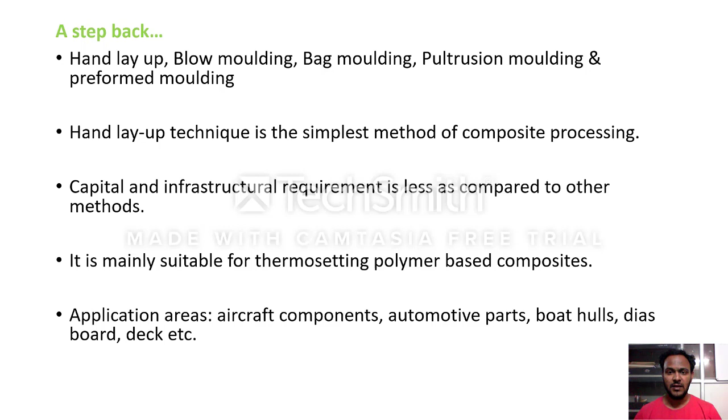So this is the brief introduction of the previous lecture. In the previous lecture I explained in detail about the hand layup process, you can go through those slides. In today's lecture, on blow molding, another manufacturing process which we are going to see.

So what is this blow molding? Blow molding is the manufacturing process that is used to produce hollow plastic parts by inflating a heated plastic until it fills a mold and forms a desired shape.

Here you can see names like hand layup, blow molding, bag molding, or pultrusion molding. The name hand or blow, whatever it says, speaks about the working principle involved. So when it is hand layup, it is clearly understood that by using your hand you make the composite. But here it is blow molding, so something you are blowing. What are you blowing? You are actually blowing a heated plastic until it fills a mold and you form the desired shape.

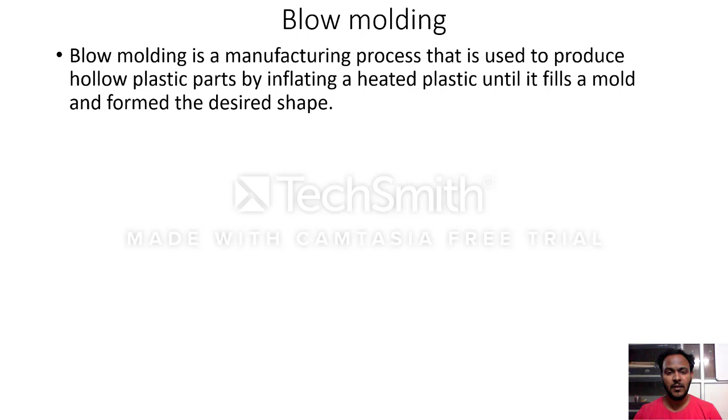How are you going to do this blow molding, that we are going to see now. The first step involved in the blow molding process is the manufacture of parison. In this process, the thermoplastic in the form of small pellets or granules is first heated above the melting temperature and molded into a preform using injection molding or extrusion process.

So the first step in the manufacture is you have to make the parison. Parison is nothing but like a preform, a plastic, normally manufactured by using small pellets of the polymers. You melt those thermoplastic polymers and then make a preform or parison using the injection molding or extrusion process. This is the first step.

These preforms are used to feed into the blow mold. Here the preform is heated above the glass transition temperature and formed into a hollow tube which is called parison. So the preform, whatever you want to manufacture, you have to heat above the glass transition temperature, actually melt it, and then convert it into a rigid hollow tube which is called parison.

The parison is nothing but a tube-like piece of plastic with a hole in one end through which compressed air can pass. So the first process is the parison manufacture, which you make by using injection molding or extrusion process. Once you manufacture the parison, the next step is the blow molding process, which we are going to see now.

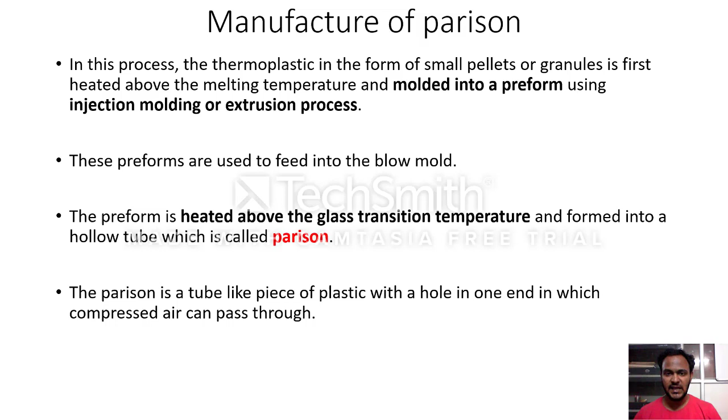What is the working principle of blow molding? Here, the parison is clamped between two mold halves and inflated by high air pressure until it conforms to the inner shape of the mold. Now I will show you a picture in which you can clearly understand how this blow molding process is performed.

You can see the picture here, number 1, shown here. There is a rod connecting, and here a tube shown, and there are two halves that are separated. These two separated halves are nothing but the mold cavity, and this tube is called the parison. This parison you have manufactured through injection molding or extrusion molding, and it is open on one side and closed on the other.

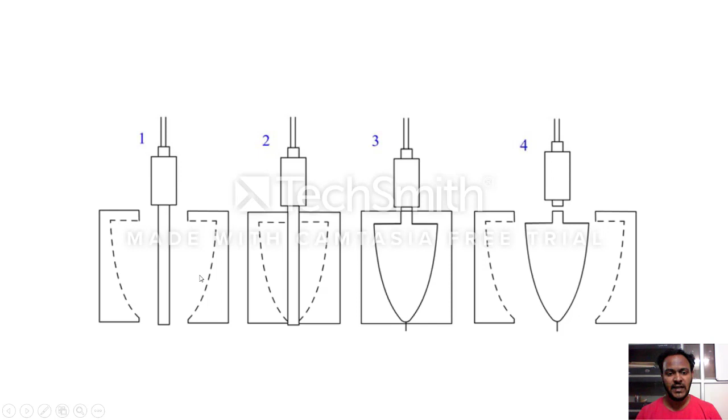So you mount the parison over this rod, and in the first step these mold cavities are kept open. Now coming back to our discussion, first the parison is clamped between the two mold halves and inflated by high air pressure until it conforms to the inner shape of the mold.

In the first step you mount the parison, and in the second step the split halves are closed. The third step is you blow the parison through this rod, injecting compressed air, so that depending upon the blowing pressure, the plastic takes the form of the mold cavity. Then the split halves of the mold get opened, and the product comes out. This is a brief description of the process.

The air pressure used for blowing is around 60 to 140 pounds per square inch, depending upon the material used. The preform is always stretched from the center of the part during the process. Here, preform means it's the parison.

This is a single stage process, as both the preform manufacturing and bottle blowing are performed in the same machine. You can use the same machine for both the parison manufacturing and the bottle blowing. The formed part solidifies as it is cooled inside the mold. The mold halves are separated and the final product is removed. The final part may be trimmed.

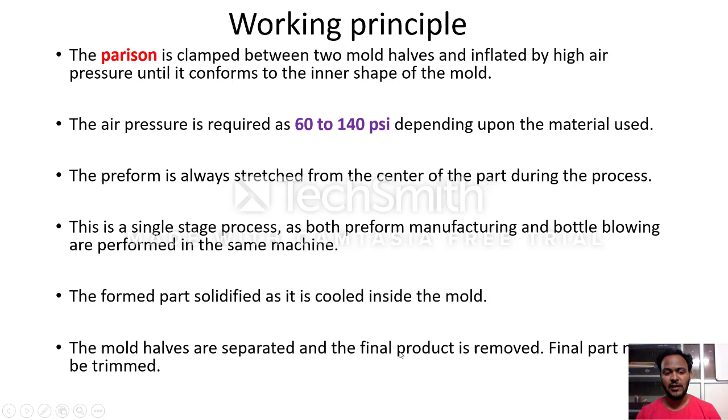This third step is one of the important processes, because during this step you blow the compressed air inside the parison so that it gets expanded. When you blow the compressed air, you actually do some heating also. So because of the compressed air and heat, this parison gets expanded and then takes the shape of the mold.

In the fourth step, once it reaches the required shape of the mold, you have to reduce the temperature, because here you heat the material to the glass transition temperature - the transformation of the polymer from the glassy state to the rubbery state.

So here the polymer, the plastic parison, has transformed from glassy state to the rubbery state. Once the parison has expanded to the required shape of the mold cavity, you need to reduce the temperature, because finally you have to remove the manufactured product. So you bring the temperature down to normal, less than the glass transition temperature.

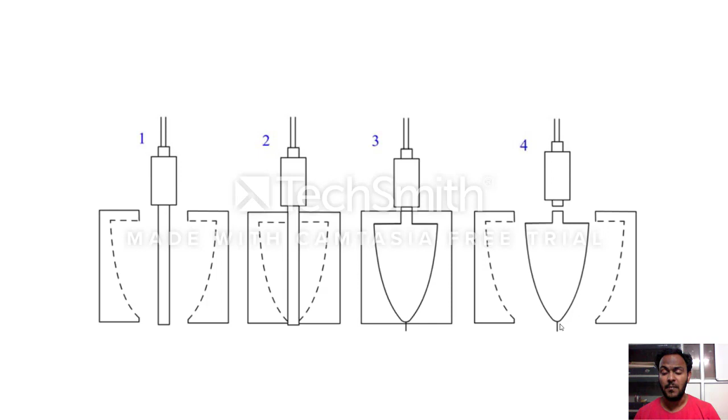Generally, the mold is made up of metal, and the cycle time depends upon the finished wall thickness. If the part wall thickness is 1.5 millimeter, the cycle time will be 40 to 50 seconds - that's how much cycle time is required for making the product.

Then you cool the polymer and trim it so that you get the product. Now I will show you a small animation here.

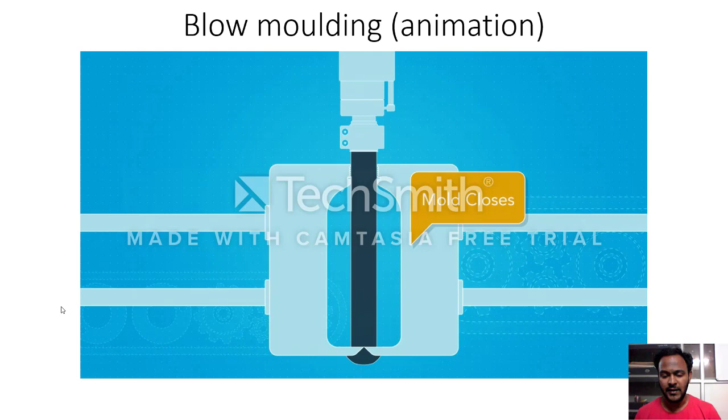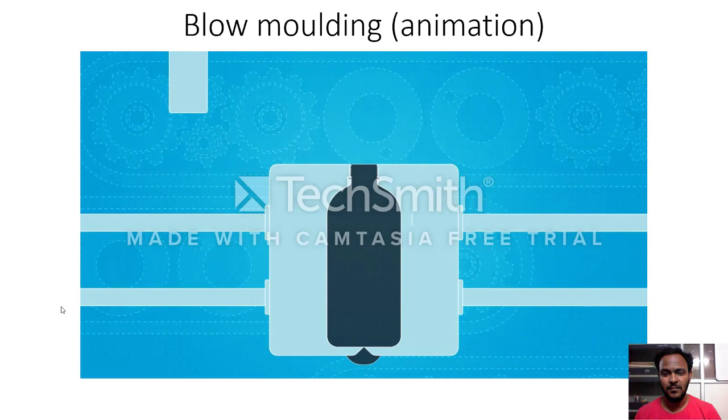This is how the parison drops and the mold gets closed, and you blow it, so the excess is trimmed down once the bottle is made, and the cavity opens, and then your bottle is ready. This is a small animation which I showed you.

Now coming back to our discussion on blow molding, we will continue with the process parameters. What are the important process parameters involved in blow molding? One is the amount of plastic material, two is the melting temperature of the plastic material, three is the air pressure required, and four is the cooling time.

The amount of plastic material is one of the important parameters. This is decided by how much amount of pellets you use to manufacture the parison. So the parison thickness is decided by the amount of plastic material. Next is the melting temperature of the plastic material.

Melting temperature of plastic material is not fixed. It varies from polymer to polymer. For example, polyester has a different melting temperature than polypropylene, and polyethylene has yet another melting temperature. So it will be different for different polymers.

Next is the air pressure required, which is the blowing pressure using compressed air. That compressed air pressure should be between 60 to 140 psi. It should neither be too low nor too high. If it's too low, it will not take the required shape of the mold. If the air pressure is too high, it will create excess blowing and cause defects in the manufactured product.

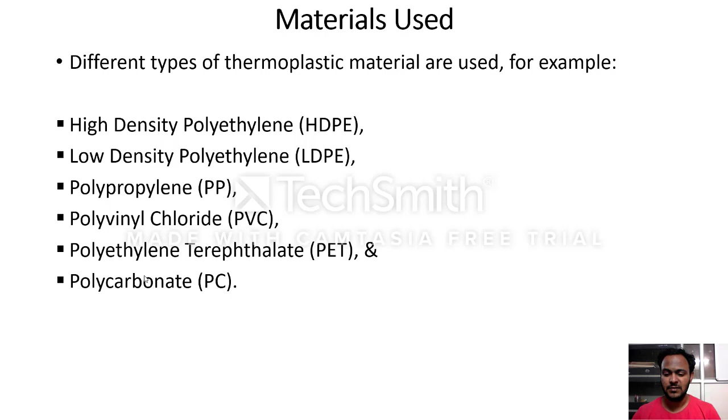What are the advantages? Since it has a very fast production rate, as you have seen, each step happens sequentially in a very fast manner. So the production rate is very high and the tooling cost is very low. Another advantage is the ability to mold complex parts with uniform thickness, depending upon the size of the mold.

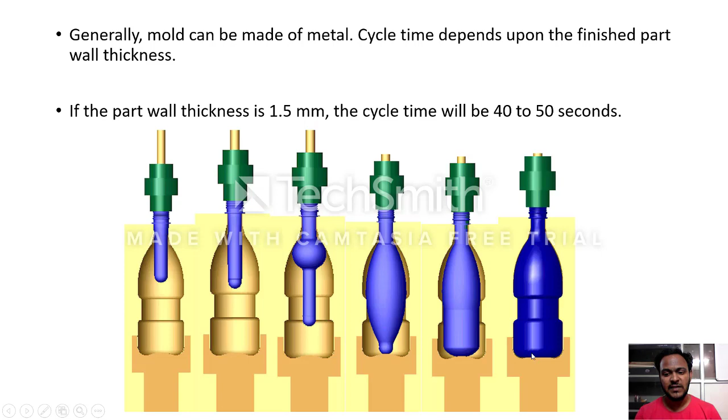Here, very little scrap is generated. What is this scrap? Once you manufacture the mold, in the top portion where the lid is and the bottom portion, whichever excess plastic is there can be easily scrapped out. So only a little scrap is generated from the blow molding process, unlike other processes.

Another advantage is large hollow shapes can be produced, depending on the size of the mold used for manufacturing. The final advantage is that produced parts can be recycled, like plastic bottles, which can be melted again and converted back into a parison and reused. This is a great advantage as it reduces pollution.

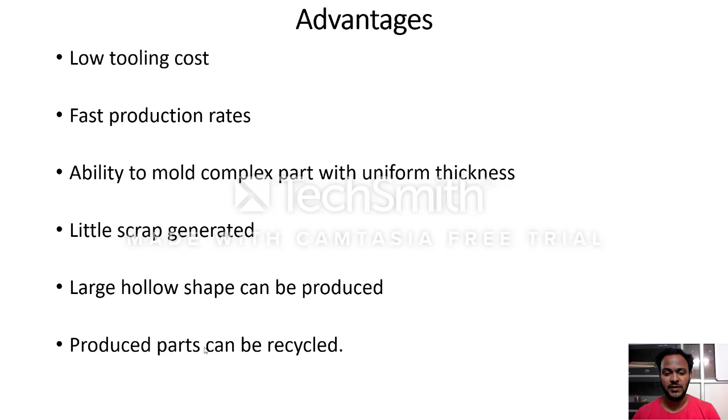Now what are the disadvantages? It is limited to hollow parts; thick parts cannot be manufactured. So though there are many advantages, there are also disadvantages. This process is limited to hollow type parts only. If you want to make a large part, it may not be possible using blow molding; you may have to use other processes like rotational molding.

Thick parts cannot be manufactured - this is another disadvantage. If you observe any plastic bottle, you can see the thickness is not high, it is less only.

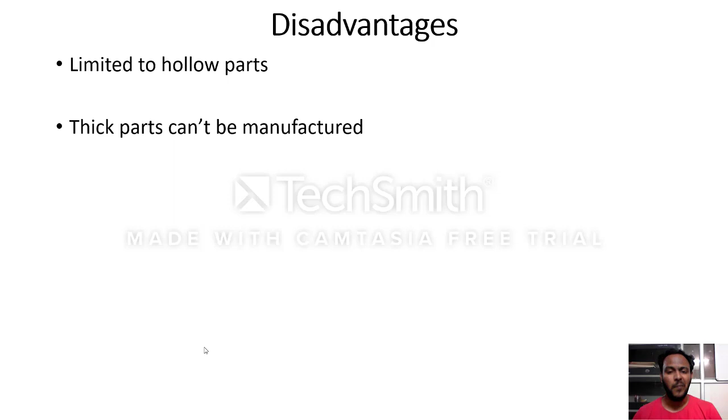Next, coming to applications, different types of plastic products can be manufactured by this process, such as bottles in different shapes and sizes, jars and containers, ducting, fluid oil tanks, mugs and toys. These are non-engineered products like bottles, jars, mugs and toys, and engineering products like ducting and fluid oil tanks. So a number of products can be manufactured using the blow molding process.

But thick parts cannot be manufactured by the blow molding process - that is the disadvantage. It is only limited to hollow parts; you cannot make non-hollow parts. For example, if you want to make a big Sintex tank, it may not be possible using blow molding; you would need another process. But you can make the basic products we use in day-to-day life - that is possible.

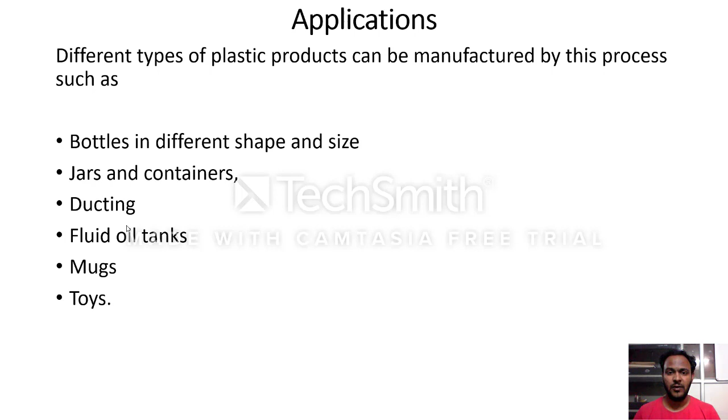This blow molding is one of the very important processes in the manufacturing of composites. So we have now come to the end of the lecture.